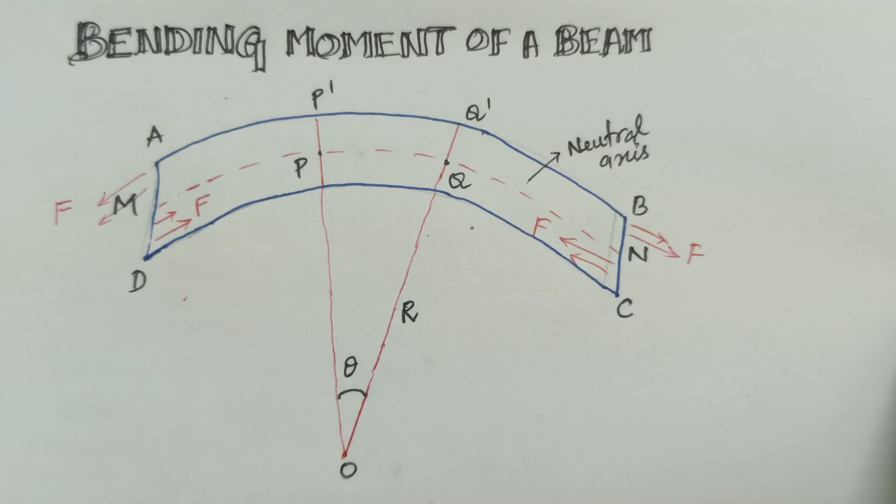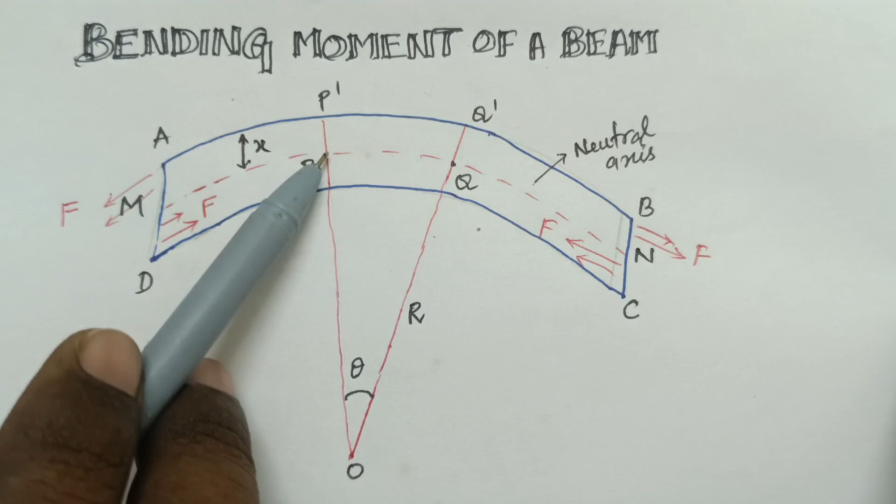Consider a beam A, B, C and D. Mn is the neutral axis. R is the radius of curvature of the neutral axis with the angle theta. The subtended angle is theta. Now consider two corresponding planes with respect to P and Q, which are P dash and Q dash, at a distance of x from the neutral axis.

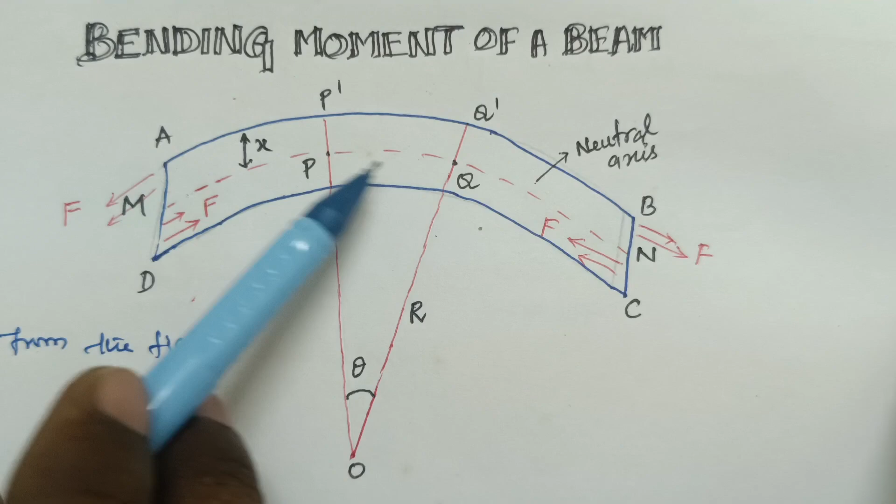Now, from the figure, the value of PQ equals r theta. The value of PQ is an unknown value. Arc equals radius into angle, so arc equals r theta. This is equation number 1.

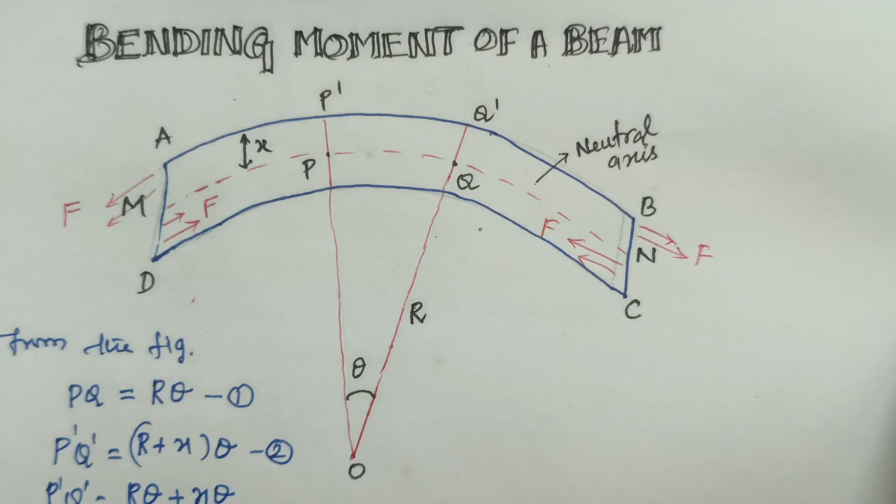Then the corresponding increasing parallel length P dash Q dash equals the length r, from the radius of curvature of O to Q. The distance from O to Q is R. Then the distance from the neutral axis to P dash is x. So the radius here is O Q dash or O P dash equals R plus X into angle theta. This is equation number 2. Now you can write P dash Q dash equals r theta plus x theta. This is equation number 3.

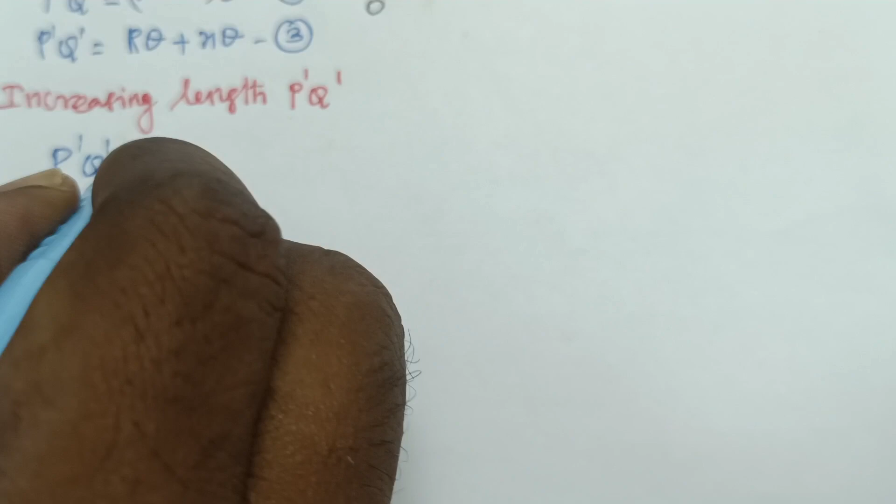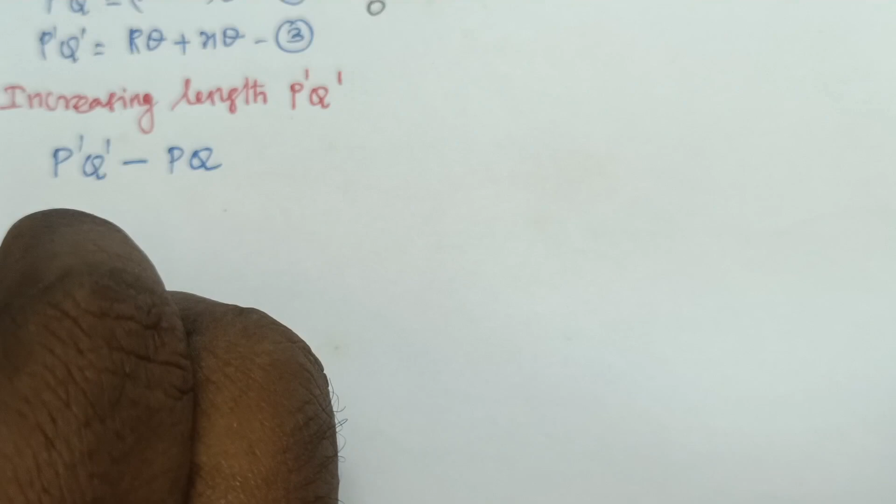Now we want to find the value of the increasing length of P dash and Q dash. Then you can find P dash Q dash minus PQ. So the increasing length is this value minus PQ. You can find, already knowing both values, P dash Q dash equals r theta plus x theta. R theta plus x theta minus the PQ value, which we already know is r theta, so we can cancel each other out, giving the increasing length equal to x theta. This is equation number 4.

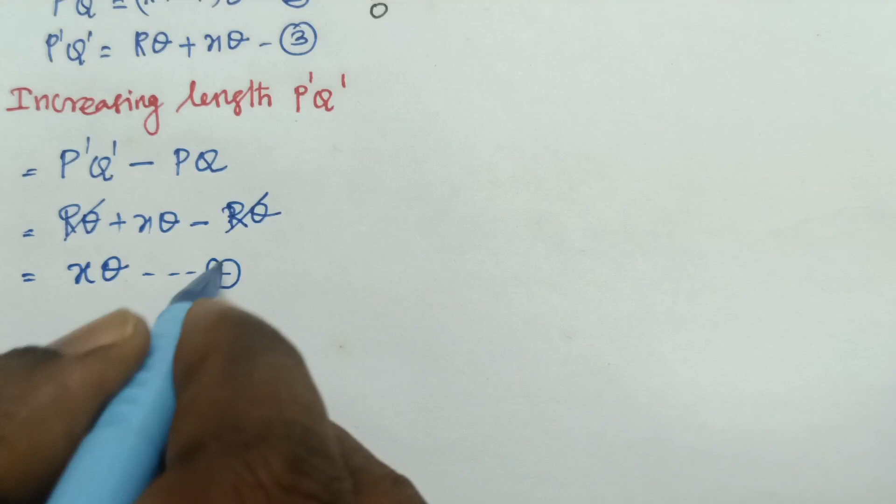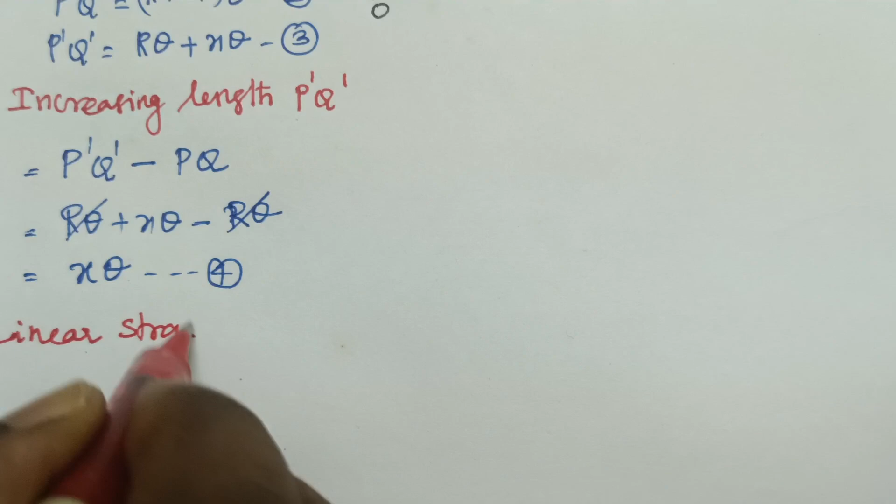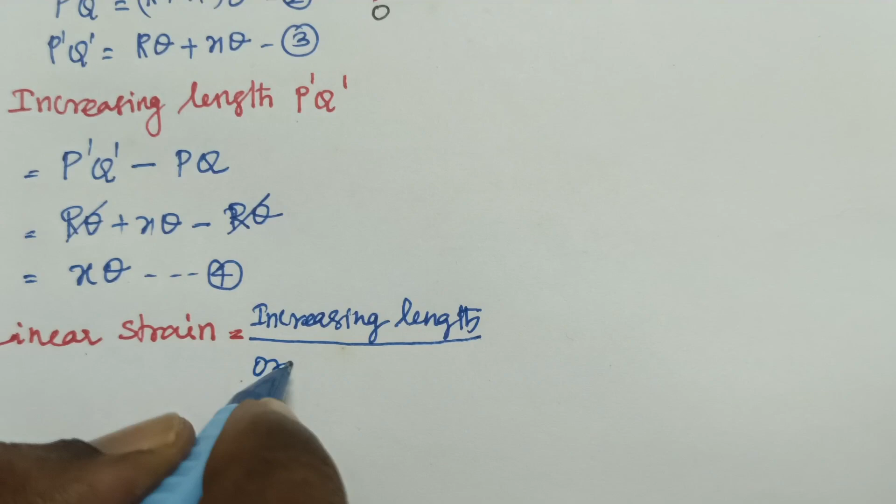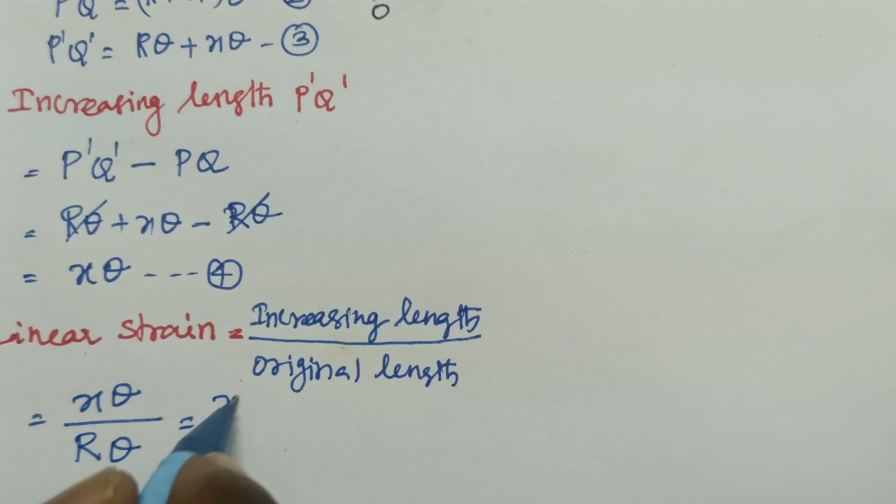Next, already you know that linear strain equals increasing length by original length. Linear strain equals increasing length by original length. Already we know the value of increasing length is x theta, that is equation number 4. Already we know the original length is PQ or r theta, then x by r is equation number 5.

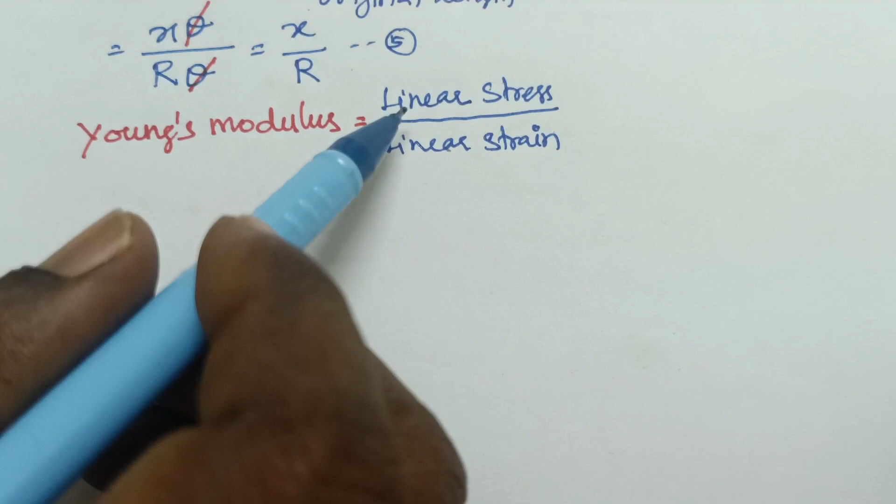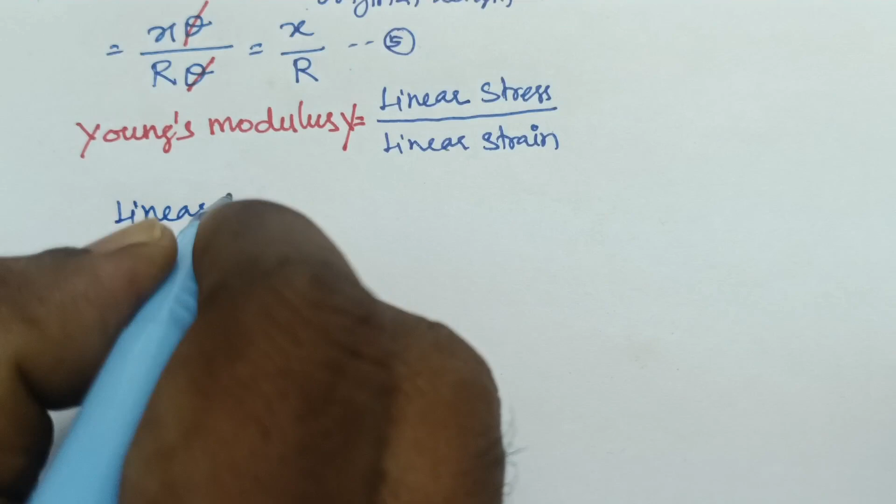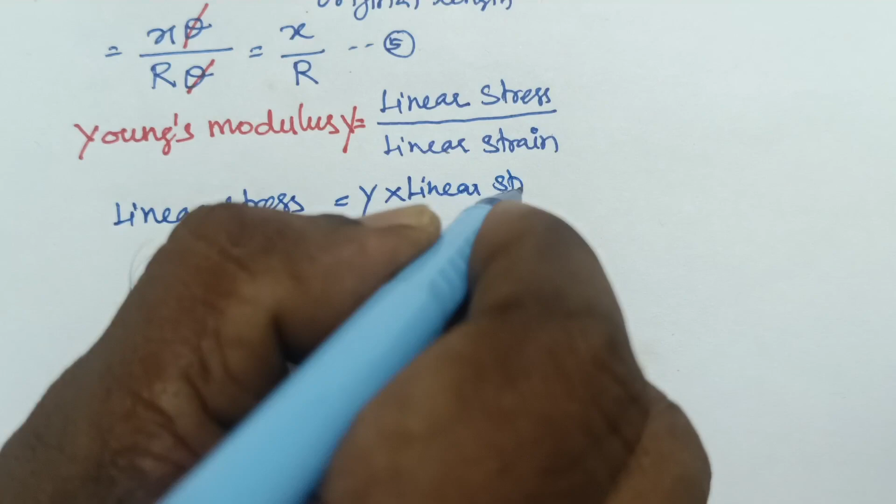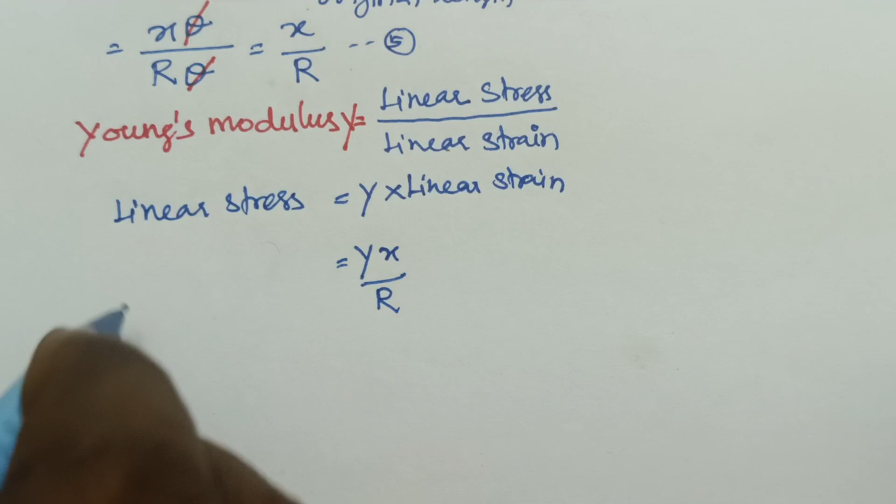Young's modulus equals linear stress by linear strain. Young's modulus Y equals. From this equation you can write what linear stress is. Linear stress equals Y into linear strain. Then already you have to find the value of linear strain, which is x by r, so it's Y x by r. This is linear stress. This is equation number 6.

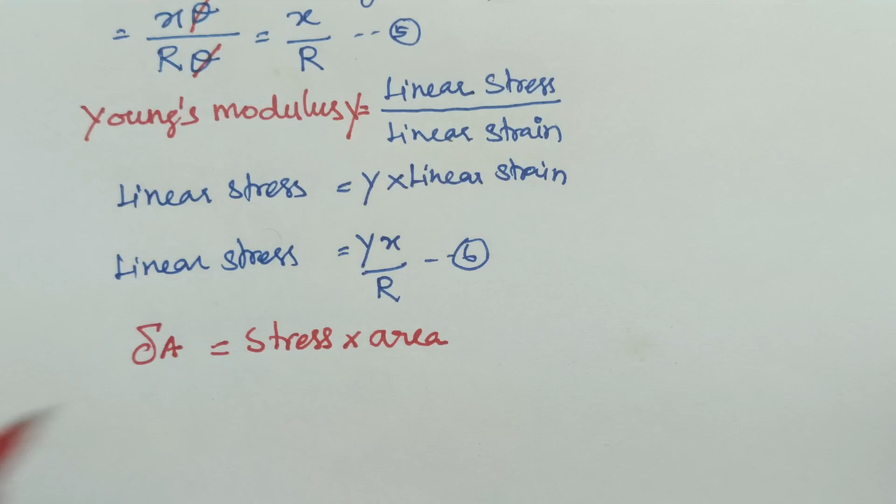Now del A is the area of cross section of the layer. Del A is the area of cross section. Now force acting on the body of del A. So in a particular area, how much force acts, we can find. That is force equals stress into area. Already we found the linear stress, so force equals stress Y x by r into area del A. This is equation number 7.

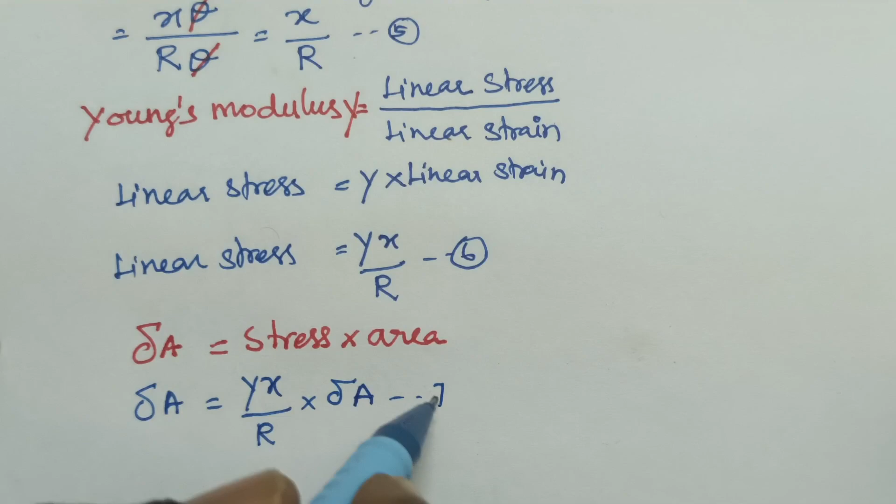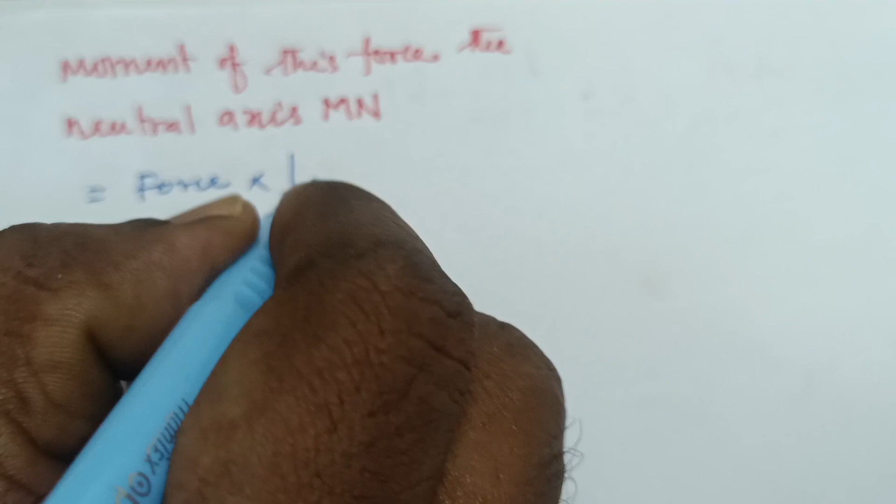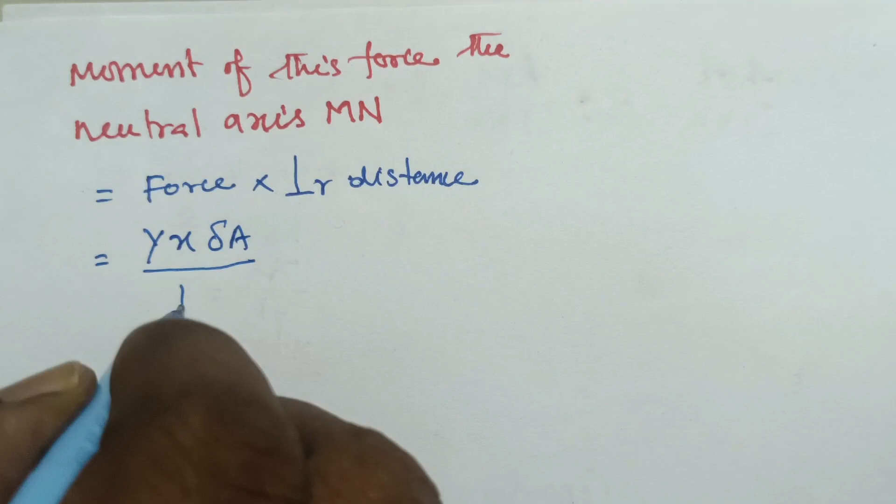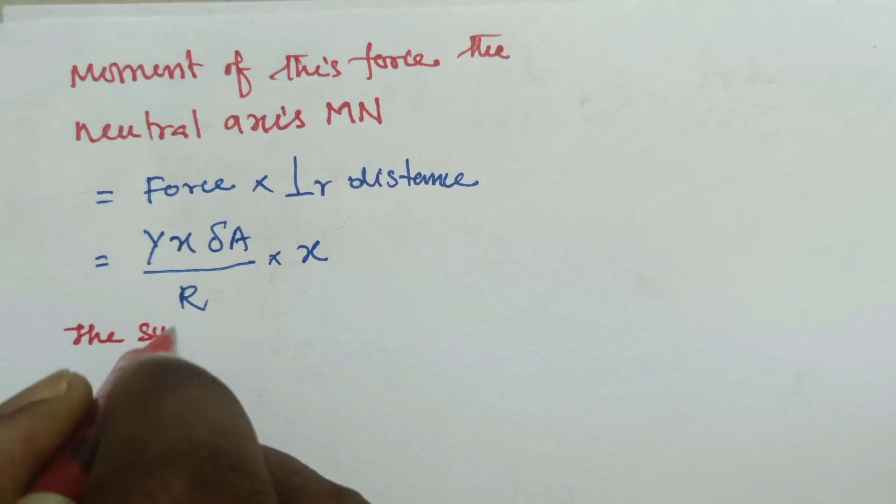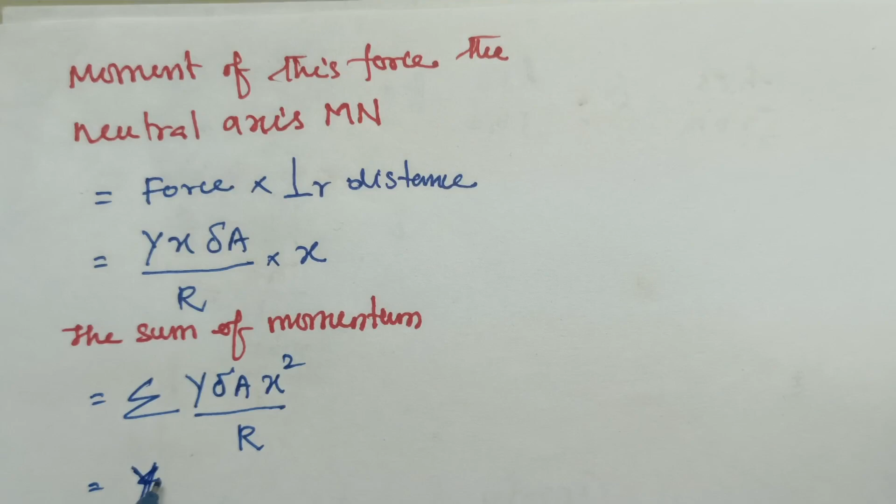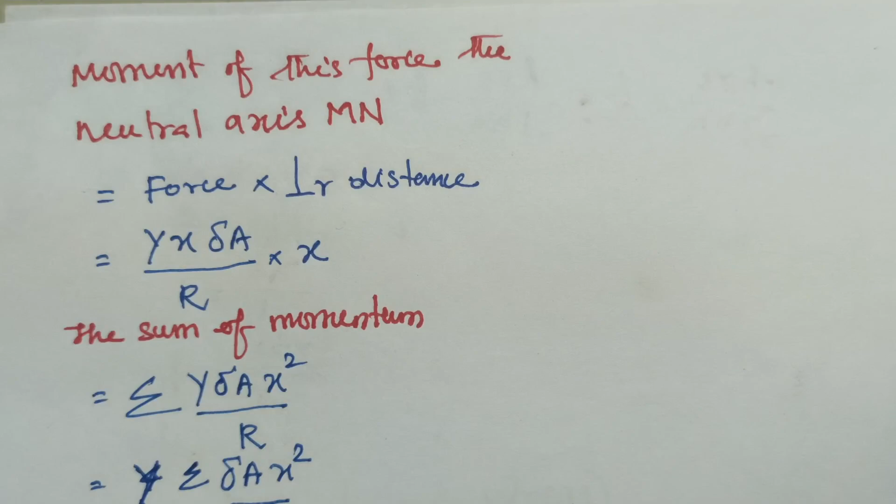Then the sum of the moment of force acting on all the layers. Now we found it for one layer. Then we have to find it for all layers. So the sum of moments of force in all layers, taking the above equations, equals summation of Y del A x squared, here x into x, x squared by r, or you can write summation, taking Y outside, Y summation del A x squared by r. Then Y I by r, where the value of I is summation of del A into x squared.

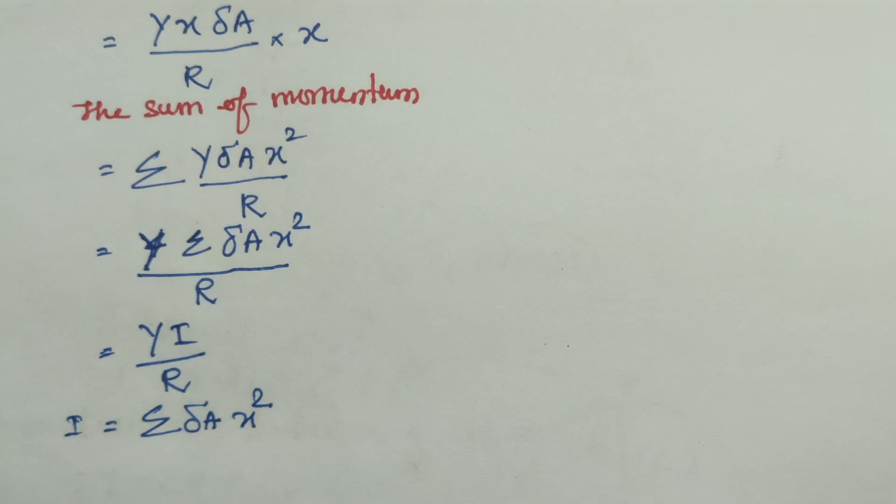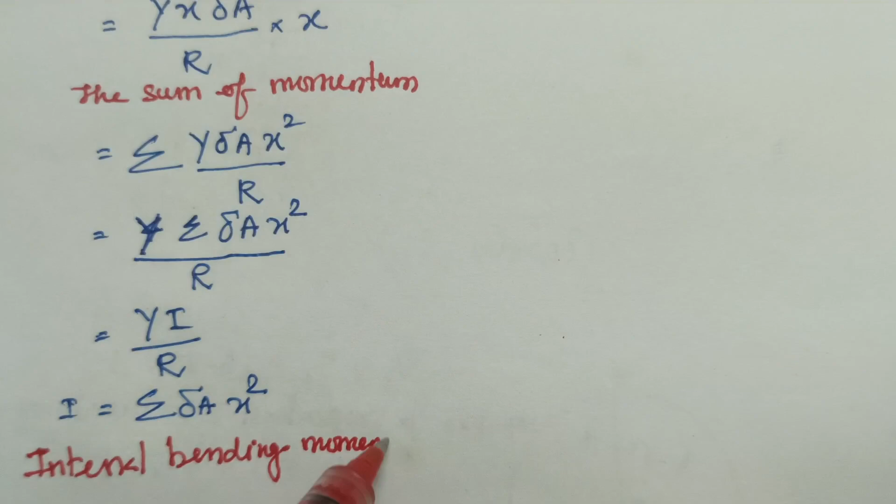This is called the geometrical moment of inertia of a cross section area, the geometrical moment of a cross section area of the beam. Finally, we can find the internal bending moment of a beam. Internal bending moment equals Y I by r.